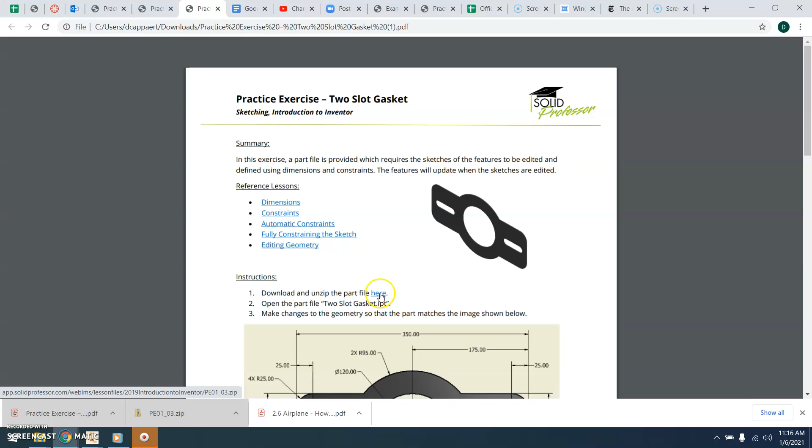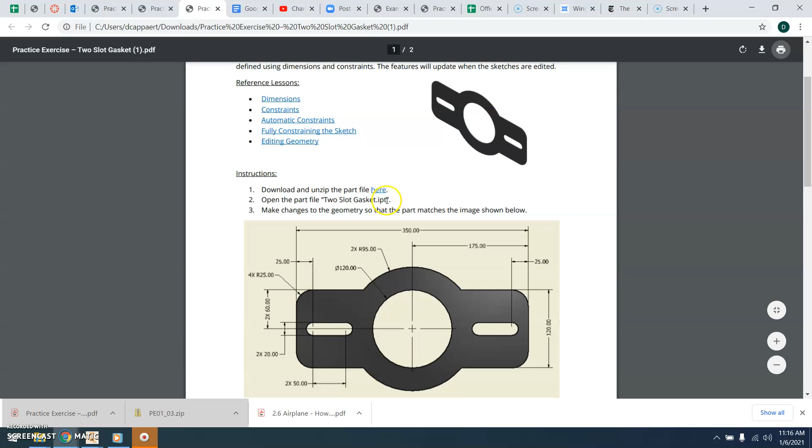So in order to download it, just click on here. And basically what you're going to do is take the part they're going to give you, it's all messed up, and then you're going to have to put all these dimensions onto it to fix it up. So the point being learning how to use constraints.

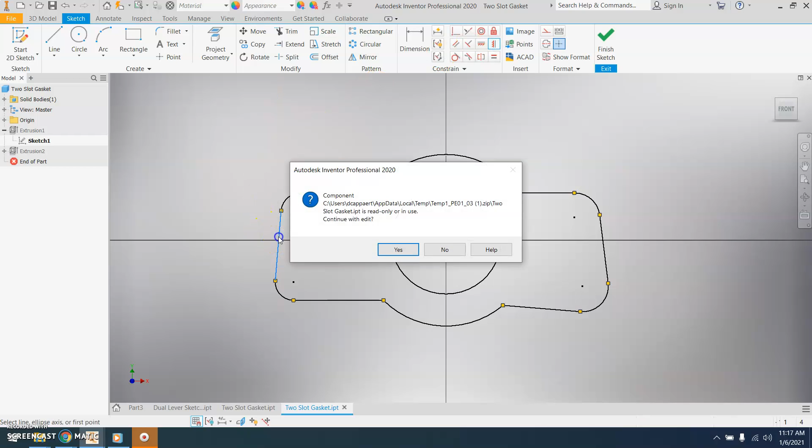So then if you open it up, you'll see that it's really off. At first I didn't know it was supposed to be like this. I'm like, whoa, what is happening? So I start with the first sketch and get it cleaned up. There's no particular spot where you have to start, but one of the things that was driving me crazy is these sides here. So if you use the, oh, my bad.

So hit yes. If you use that vertical constraint right here, you can make these lines so they're perfectly vertical. I believe these are all horizontal, but yeah, okay. So is that, yep. So you can always double check. This one definitely isn't. So got that.

One thing I noticed too, this is kind of cool. You notice that these points aren't in line with each other. And I was trying to figure out what constraint would that be? I noticed that this vertical one can also fix this situation as well if you hit these 2 points. So now we got a shape that's looking a little better. At least it's not all over the place.

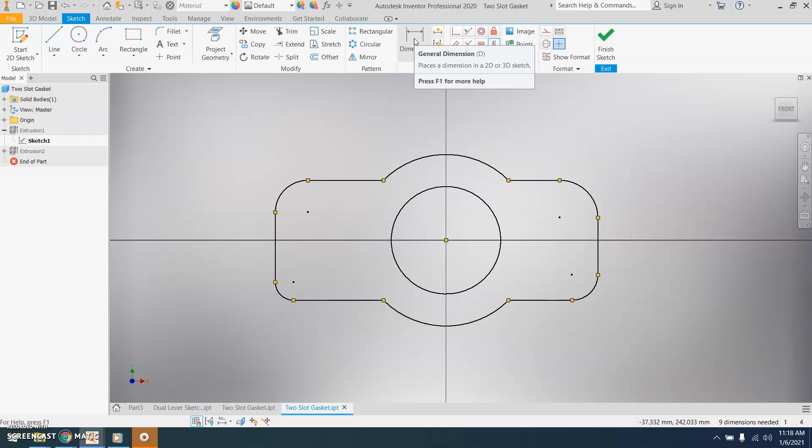And then I think the rest of the steps are quite a bit easier, where you're just going to start adding in the dimensions to it. So for instance, the diameter on here is all off. It should be 120 millimeters. The radius on this is all off too. That should be, well, it's close. It should be 95.

So then from here, just keep adding your dimensions. Make sure that you're following along with the sheet they gave you. So this is 120. That looks pretty good. You know, the one thing I get concerned about though is, is this centered?

And if you've got that concern, it looks like it is, but if you want to really do a good job, what I would do is a line and make it a construction line and draw that through the center. And then maybe do one down the middle too. That might help you in dimensioning to make sure this thing's symmetrical.

And this would be a lot easier to just do from scratch. If I was doing it from scratch, I would just do half of it and then mirror it over. But the whole point, like I said before, is to actually learn how to use the constraints and fix a sketch. That's what they're teaching you here. So yeah, notice it was centered.

So 60 and 60 is the 120 like they asked for, right? Same thing over here, 60, yep. Oh, I already said that these are in line with each other. So anytime you get parentheses around, that means that you put that dimension twice, so it's not needed. So from there, is there anything else that's particularly difficult here? I wouldn't say so. You know, from here to the outside, it says it is 175.

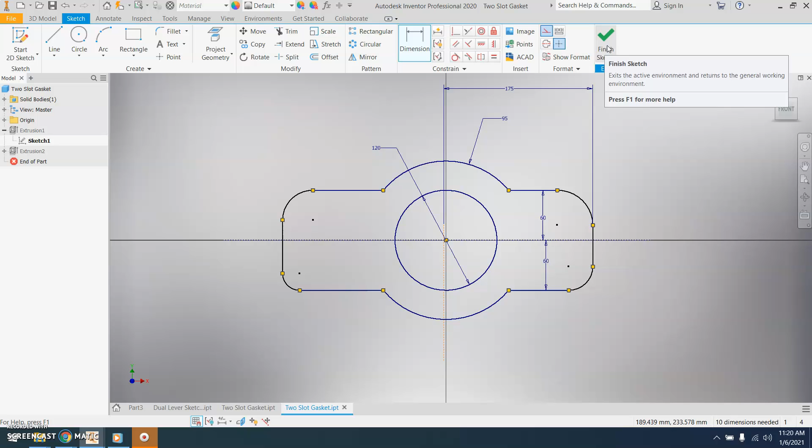All right, so once you fix this all up, you got a couple more dimensions you got to put on this. Like I said, if it's not finished, you need to finish that on your own. Then I would next go into extrusion 2 and then fix that. And once again, you can use this horizontal tool to make that horizontal, for instance. You're going to have to use the dimensions to then center these on there as well.